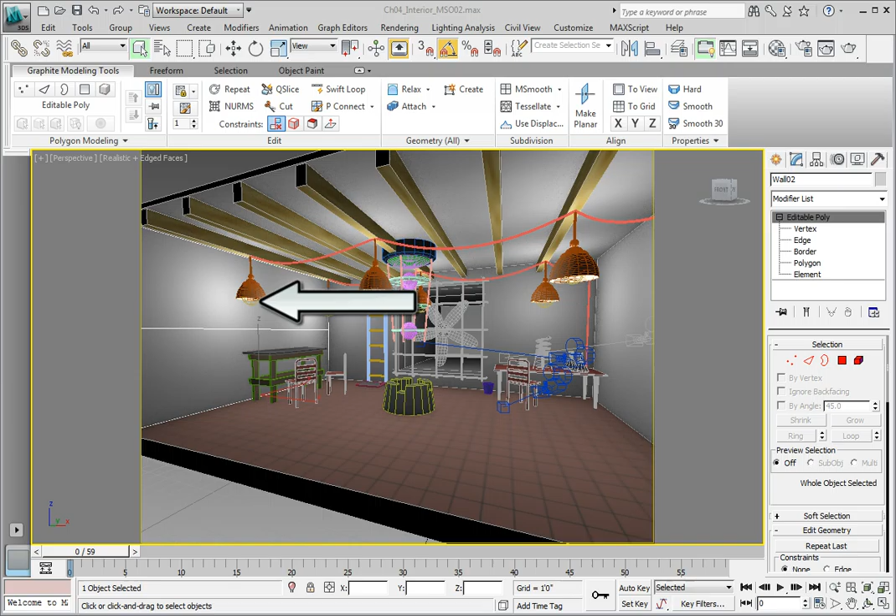We've assigned material ID numbers to the polygons in the wall of our lab. Now we're going to create a multi-subobject material that we will use to apply to that wall, so the top of the wall has a different material than the bottom of the wall.

We are currently working in the file Chapter 4 Interior MSO02.max. If you don't have the file open, navigate to the Chapter 4 Datasets directory and open the file. We're going to open the Compact Material Editor by clicking on the Material Editor icon in the main toolbar, holding down the left mouse button and selecting the Compact Material Editor from the flyout, which is the top icon.

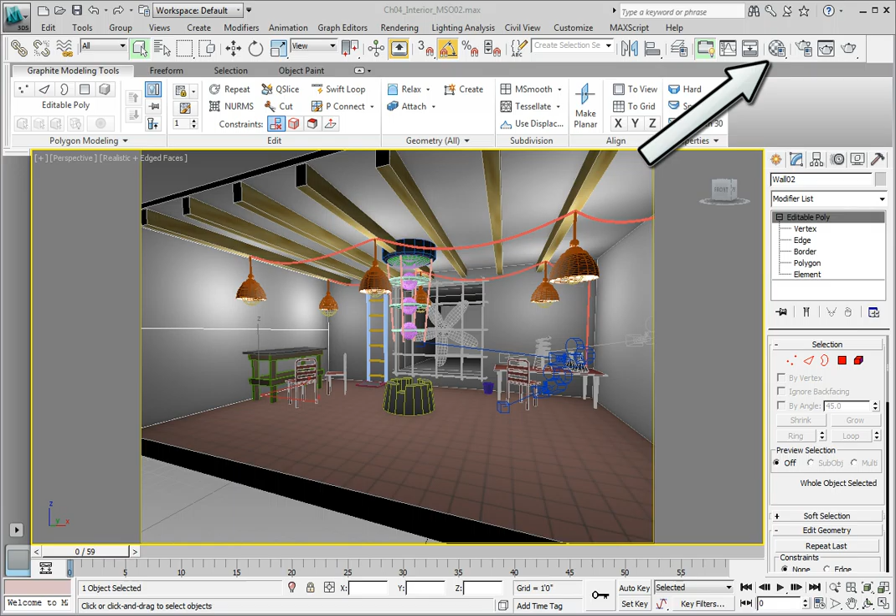What we're going to do here is use our existing concrete material. We're going to change that material type into a multi-subobject material and retain our existing concrete material. Then we'll copy it and make a new blue-colored concrete material. This will allow us to satisfy our customers' needs of having a blue painted concrete on the top of wall

02 in the lab. In the material editor, navigate over to the concrete material. It should be the second one from the left in the top row. This material is an Arch and Design material. We're going to do something called changing the material type. We're going to change this from an Arch and Design material to a multi-subobject material.

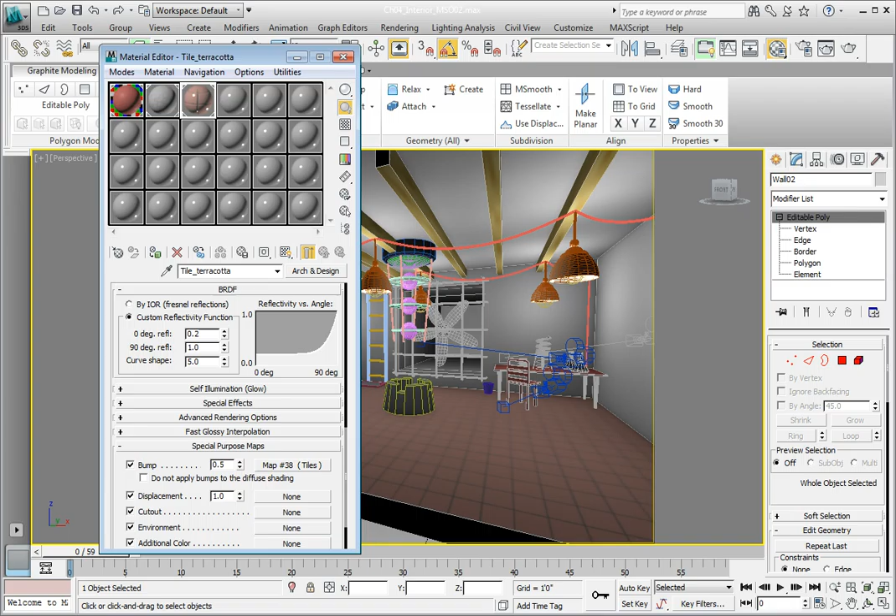Go ahead and click on the Arch and Design button. In the Material Map browser, double-click on the multi-subobject material. When you double-click the material, or you can select it and then click OK at the bottom left of the material browser, you will be presented with a dialog asking you whether you want to discard the old material or keep the old material as a submaterial. Since we want the wall to be a part of this material, we want to make sure that we have the Keep Old Submaterial option selected.

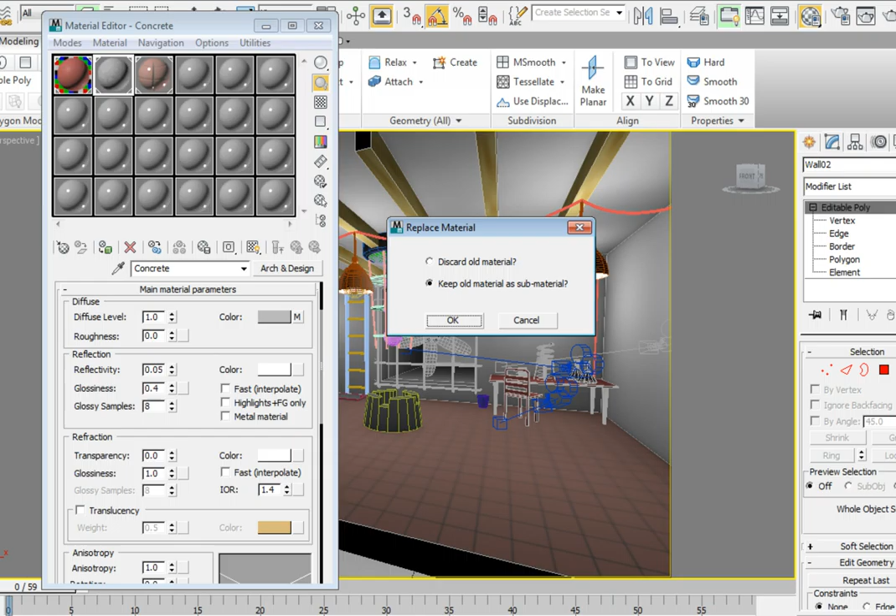Click OK. The material is now replaced with a multi-subobject material, and we now have our original concrete Arch and Design material in the material ID number 1 slot. We also have 9 other material IDs that are available to us by default. We really only need a total of 2 materials for this wall. In order to simplify things, let's set the number of materials to 2. Remember that we can have up to 1,000 submaterials. We don't need them right now, so we're not going to use them.

Click on the Set Number button. Enter 2 in the value type in, and click OK. Now we have 2 materials, a concrete material, and then just a standard default gray material. We're going to drag the Arch and Design material called concrete down onto the material ID number 2 slot and copy it. Click with your left mouse button, drag the concrete material on top of the material ID number 2 material slot, release the mouse button to drop the material.

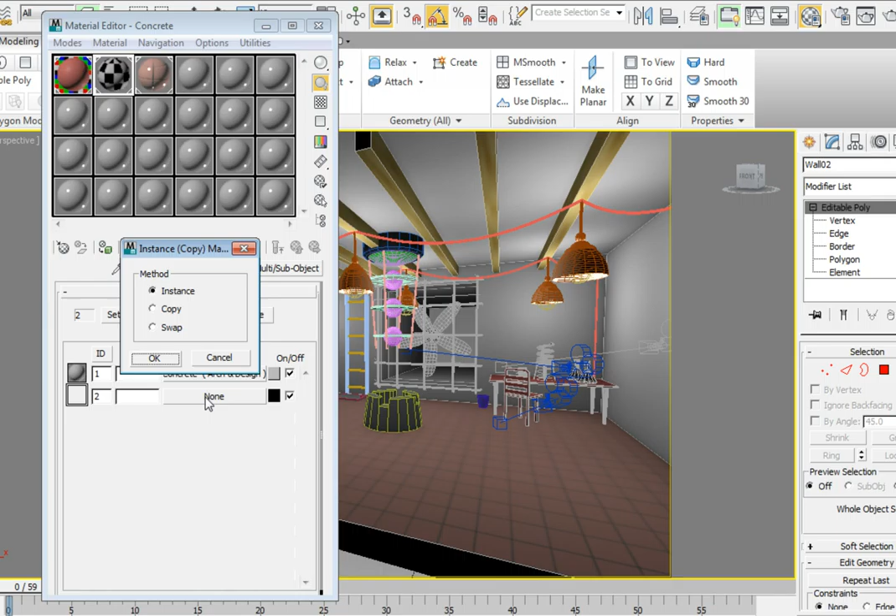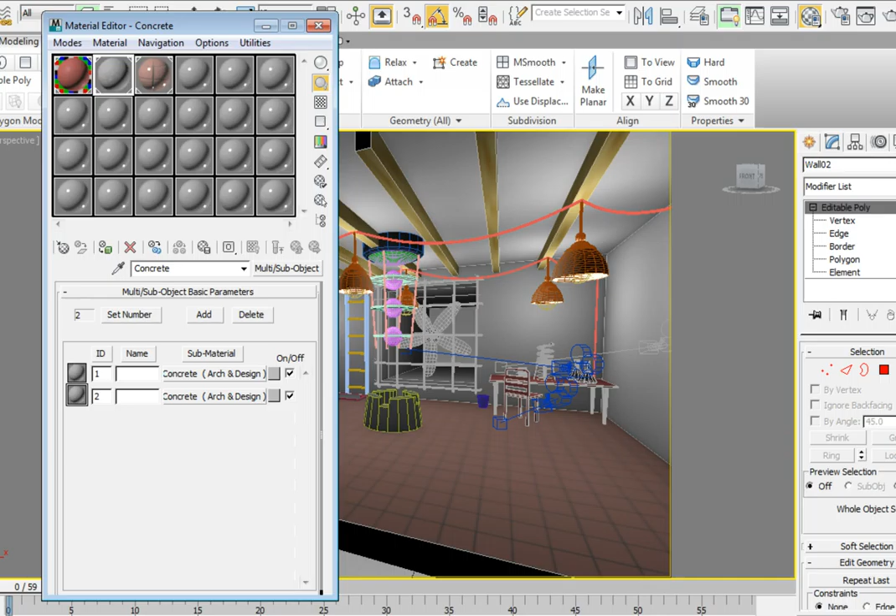In the Instance Copy Material dialog, we want this to be a copy. Select the Copy option, and then click OK. Now we have a multi-subobject material with 2 materials that are exactly the same. Let's drag and drop from the material slot to place this new material onto wall 02. Go ahead and drag and drop the material to wall 02, and it will assign it to the wall.

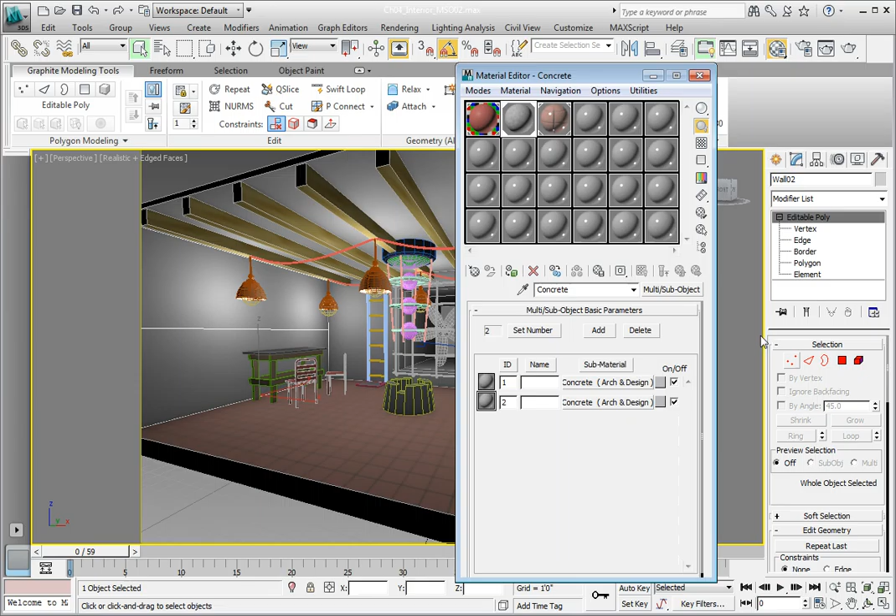Nothing has really happened yet. But notice in the Multi/Sub-Object Basic Parameters rollout of the material editor, the gray concrete is material ID number 1, and we have a copy of it in material ID number 2. In order to change it to blue, we need to edit the second material. Let's use the Material Map Navigator to help us with this. Click on the Material Map Navigator icon in the material editor. This opens the Material Map Navigator.

Click on the diffuse color map for the concrete material in ID number 2. In the material editor, click on the Color 1 color swatch. In the color selector, change the color to a blue color. I'm going to make this a fairly noticeable blue. I'll leave it up to you to change the color to whatever color of blue you want. After long discussions, you discover this is exactly what your client wants. So, of course, you're going to give them what they're asking for.

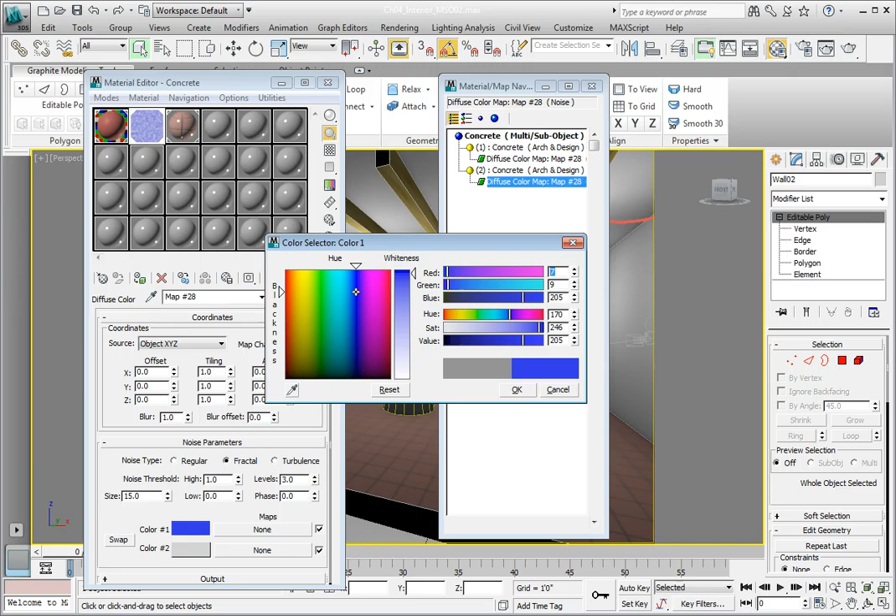Change the color number 1 to blue, click OK in the color selection dialog, close the Material Map Navigator, and we can close the material editor as well. Make sure you right-click in the perspective viewport. With the perspective viewport active, go to the main toolbar and click the Render button.

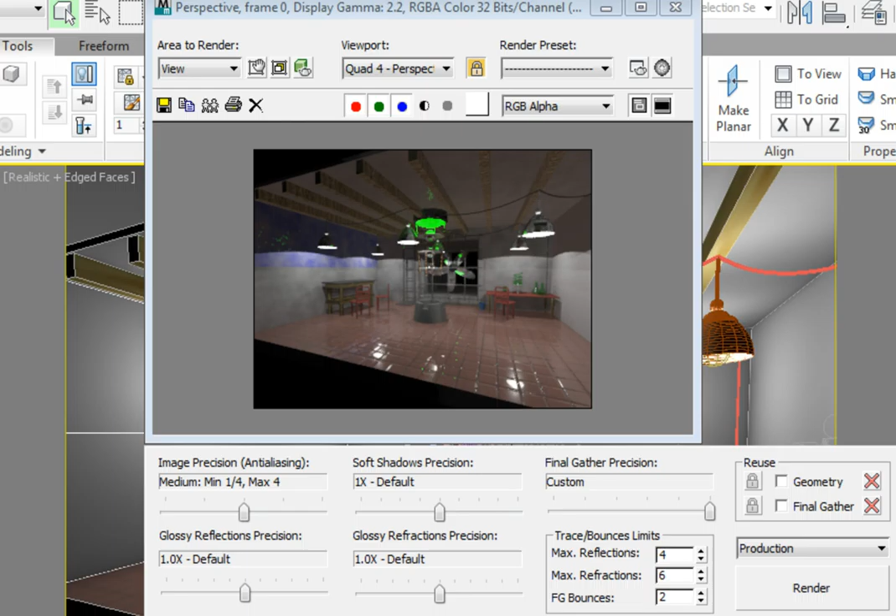Now you can clearly see that we have 2 separate materials on the wall 02 object in our lab scene. You'll also notice that the noise pattern is the same. All we've done is change the color in the color number 1 parameter of the noise map that we modified to become our concrete. We've created a multi-subobject material with 2 materials.

Any polygon with material ID number 1 gets the gray concrete, and any polygon with material ID number 2 gets the blue concrete. This is a very simple process that provides a very flexible workflow. Press Ctrl S to save your file.